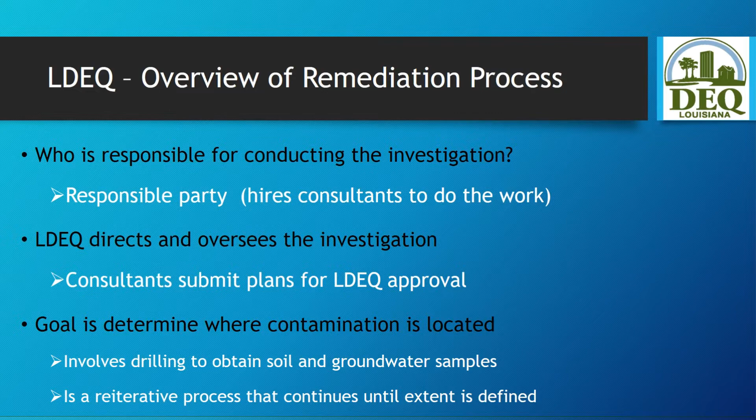Now to discuss the remediation process as it relates to the Dresser facility, which is located at 8011 Shreveport Highway in Pineville, Louisiana. In this particular case, the department was notified of a total petroleum hydrocarbon detection in groundwater at a single location on site in the summer of 2012. The site was assigned a DEQ team leader to oversee all activities, who directed Dresser to submit a work plan to delineate that detection. Once the work plan was submitted to the department and the department was satisfied with the work to be conducted, Dresser scheduled that work to be completed by contracting with a drilling contractor. The initial soil and groundwater investigation was completed on site, and once the sample results were obtained from an environmental lab, a final report was put together and submitted to the department.

The report, which was reviewed by DEQ, indicated the contaminant was a chlorinated hydrocarbon, trichloroethylene, commonly referred to as TCE, rather than a petroleum hydrocarbon as originally reported. TCE was detected in the delineation borings which were completed. Based on those results, Dresser was instructed to continue sampling outward from the source area to find the outer edge of the groundwater plume. We refer to this process as delineation. Dresser was also instructed to determine the likely source of the contamination and to determine groundwater flow direction of the groundwater plume. The process of determining the extent of contamination is an iterative process.

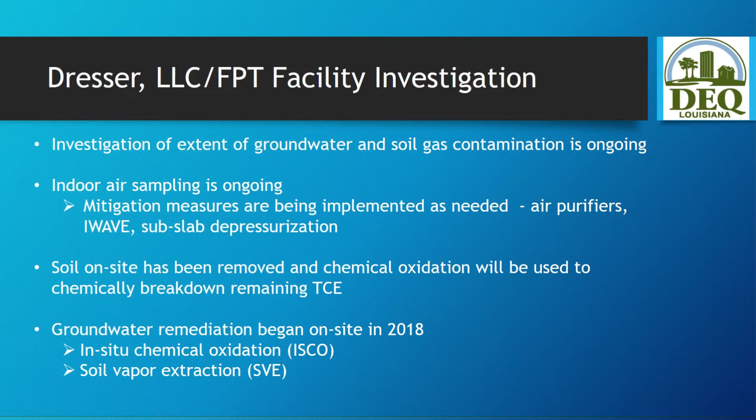To summarize DEQ's role in the response actions, the department has taken the lead in directing the investigation and remedial activities. We've reviewed, provided input to, and approved the sampling work plans. DEQ staff have provided daily oversight of the investigation. We've reviewed data conducted for groundwater, soil vapor, indoor air, and ambient air samples, and the DEQ team has participated in weekly investigation update meetings with Dresser and Louisiana Department of Health.

As discussed earlier, the department has provided notification to residents, addressed community concerns, and answered questions via phone and email, provided the community with information on the investigation online through DEQ's Dresser website and through the electronic data management system. We've updated local officials and attended police jury meetings in both Rapides and Grant Parish. Following the Dresser investigation update, DEQ and LDH will address community questions and concerns.

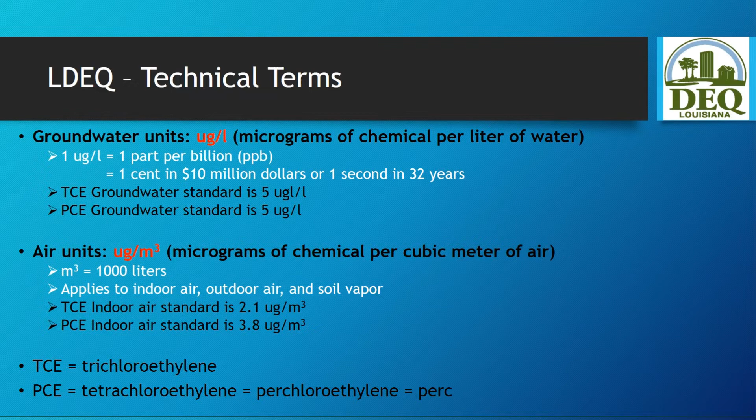I'm Dr. David Holcombe, and I am the Regional Administrator and Medical Director for the Office of Public Health, and I'm here to give you some information about the current work being done at the Dresser site. There are 3 groups that are working in this through the Louisiana Department of Health: the Office of Public Health itself, the Section of Environmental Epidemiology and Toxicology, also known as SEET, and the Safe Drinking Water Program. Next slide, please.

So LDH has a complex role in this. Part of the role is to coordinate with the Louisiana Department of Environmental Quality. They're also tasked to review sample results obtained through this various testing. They have access to subject matter experts, notably for vapor intrusion, from the Agency for Toxic Substances and Disease Registry, which is actually a part of CDC. And they also are working with the Safe Drinking Water Program. Community concerns can be submitted through a toll-free number, which is not shown here, but is 888-293-7020. Next slide, please.

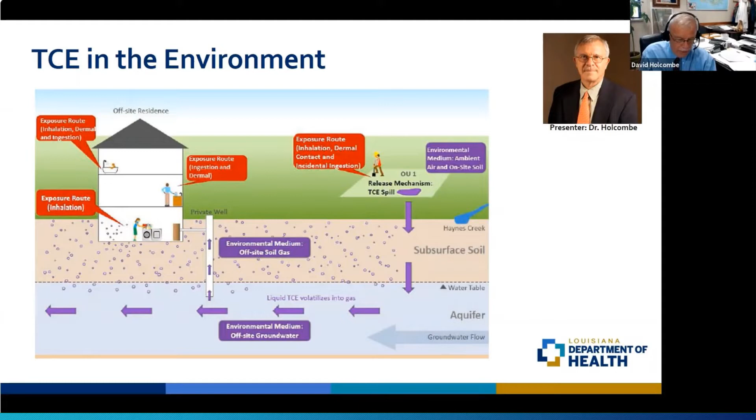So from a public perspective, there are a couple of concerns. Of course, people want to know if the drinking water is safe. As mentioned, the aquifers used for drinking water in this area are much, much deeper than where this product has been located. The public wells have all been tested, and they were found to be below minimum detectable limits, what they call non-detect. So the drinking water is safe, and it continues to be monitored regularly by the Drinking Water Program. There are no superficial private wells in that area which would be subject to contamination. Next slide.

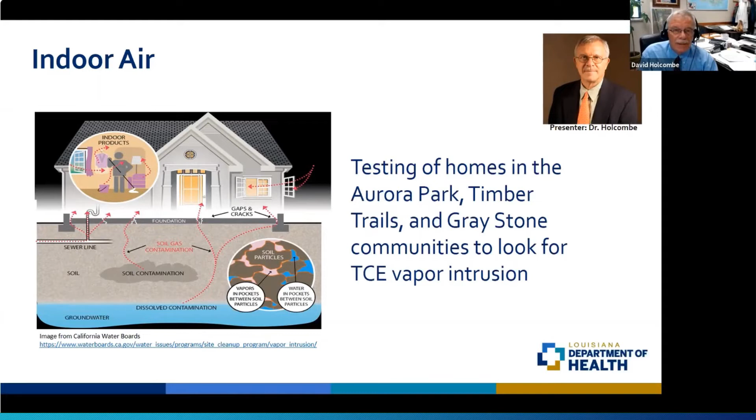So what is going on? They have been testing, trying to figure out the maximum depth and the surface area where this TCE has spread, and people in the area have seen these wells that have gone down. The other part of this is indoor air quality. They've tested in the subdivisions of Aurora Park, Timber Trails, and Gray Stone, which are near where the contamination occurred, and those places are subject to indoor air monitoring. Equipment is brought in that will determine the level of TCE that may be in the air in residences at or near this site. Next slide, please.

So what is TCE's effect on health? Well, TCE is not a good thing because it has a number of health effects. These are usually effects related to high exposures that can occur in people who work with it industrially, which is not the case here. If you were exposed to it as a product, it might give you headaches, dizziness, or sleepiness. But the levels detected in the homes in the Pineville area are well below the concentrations that have been shown to cause these sorts of effects.

Now, there are long-term effects that are related to the immune system, and TCE at very high concentrations for prolonged exposures can cause kidney cancer, liver cancer, malignant lymphomas, and a number of cancers. And this is also particularly relevant to pregnant women because it is classified as a teratogen, which means it can affect the fetus. So it is important to know if people have been exposed, and more importantly, how much and for how long.

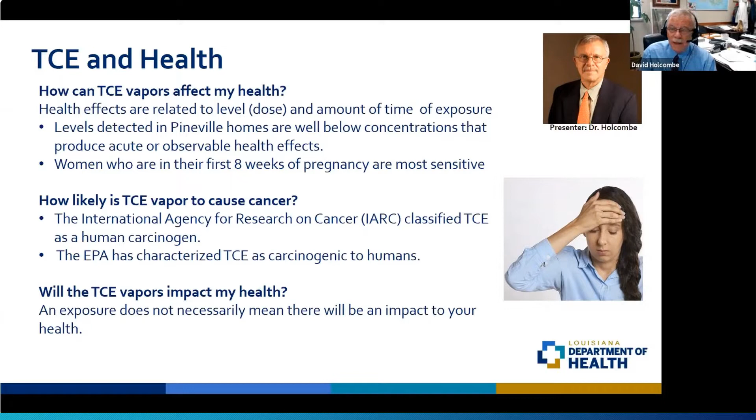So it can affect your health, but is probably not affecting health in the concentrations that are currently being detected in and around the Dresser plant. Next.

So from a homeowner perspective, the question would be, how can I reduce the risk of exposure? You're not going to get it through the water. Some homes which have been tested with indoor air testing will have higher levels. And so you want to ensure adequate ventilation in your homes. That means adequate airflow, but also sealing cracks in the foundations where the TCE vapors may intrude.

If your home has been identified for vapor intrusion sampling, please let them come in and sample. And if they find levels that are high or higher, then they will offer air purifying systems to you. And those are very, very effective. They can drop levels down by 5 or 10 times to levels that are, again, nearly undetectable. So this is more or less the basic information that we're providing to the public in the area. Next.

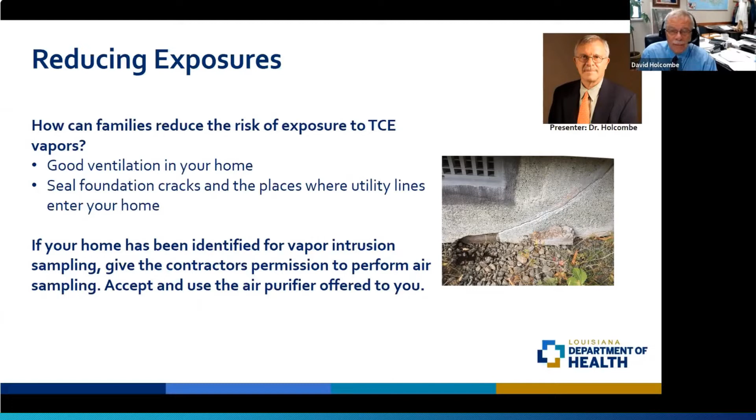There's some contact information for the SEET, which is the Section of Environmental Epidemiology and Toxicology, and to myself, Dr. David Holcombe. I am not a specialist in toxicology, but I am familiar with the area, and I have gotten a lot of information from those individuals who are involved in this project.

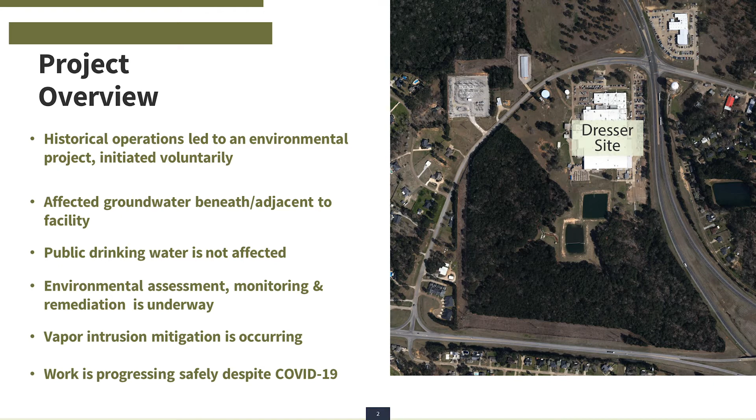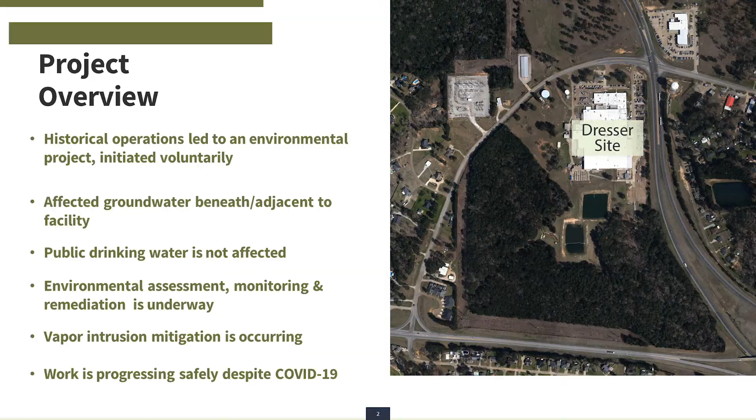In response, Dresser assembled a broad team of environmental professionals and tasked them to fully evaluate conditions at the facility and in the surrounding community. We are committed to making certain that all conditions are completely understood and addressed in accordance with appropriate state and federal environmental, health, and safety rules and guidance. There is no impact to the public's drinking water systems. We currently have assessment, monitoring, and remediation underway. We are also assessing vapor intrusion in the area as a result of our work. And I would like to thank the community for their assistance in us performing these activities during this COVID-19 issue.

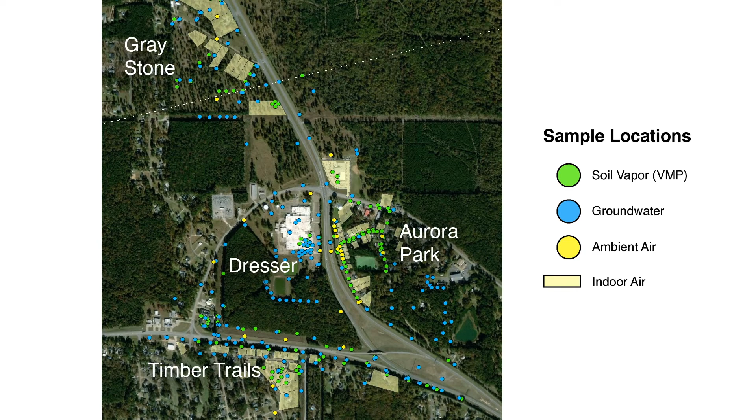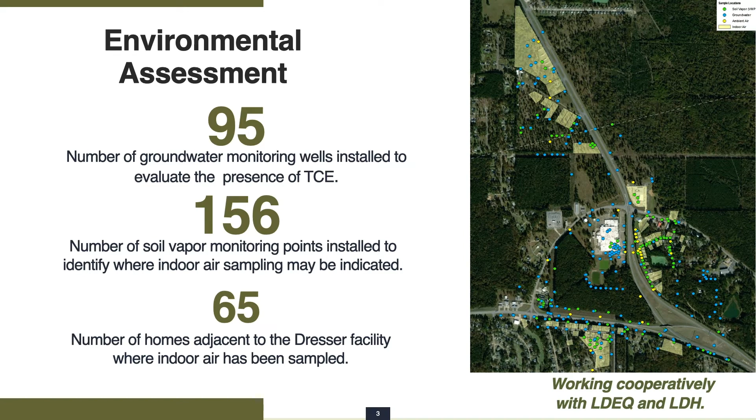Dresser has committed all of the necessary resources to fully understand the groundwater, soil gas, and indoor air conditions on and near the site. A little bit more about the assessment activities we have conducted to date. The figure on the right depicts the locations where we have collected soil vapor, groundwater, indoor air, and ambient or outside air samples. I want to emphasize that these dots on the map simply indicate where samples have been taken and don't necessarily mean that TCE has been found there. If you live near these areas, you may have seen our field crews doing their work. To date, we have installed 95 monitor wells to look for the presence of TCE. We have also installed 156 soil vapor monitoring points. Additionally, 65 homes have been assessed for vapor intrusion.

We will discuss these in a little more detail in a second. Again, I would like to thank the DEQ and Department of Health for their cooperation in this process.

Depicted here is a conceptual model of our assessment activities. We look for groundwater, for the TCE in groundwater. Depicted here on the figure is an area that contains TCE in the blue shading. We use the monitor wells to routinely collect groundwater samples to look for the presence of TCE.

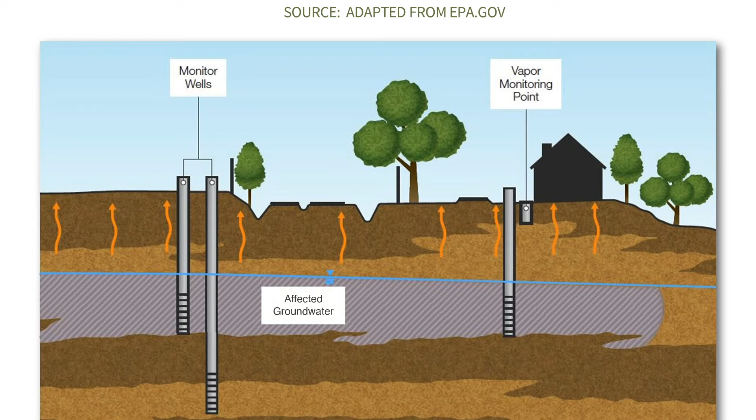TCE is a volatile compound and can vaporize from the groundwater when present. So as shown on the figure, these vapors can rise through the soil. We monitor that through the use of vapor monitoring points as depicted here. Once we identify the location of TCE in groundwater and the TCE in a soil vapor sample, we will then focus on sampling inside a house to determine if those vapors are present.

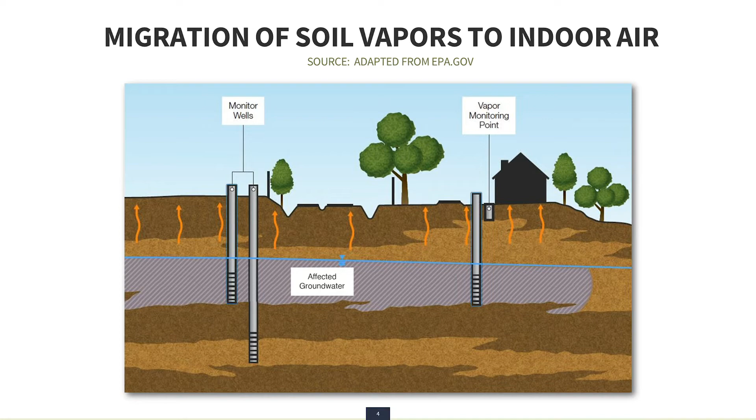As also depicted on this figure, monitoring is being conducted in multiple groundwater bearing zones. We only find the TCE now in the shallowest groundwater zone at and around the site.

So let's talk a little bit more about the groundwater assessment. The goal of our assessment is to look for the chlorinated chemicals of interest, specifically TCE, PCE, and some of the other breakdown products. Again, presence of a dot doesn't necessarily indicate the presence of TCE, just that a sample was taken there. We use this data to assist us in identifying those locations for indoor air sampling. This is a data-driven process.

We evaluate the data that's collected and then propose additional locations so that we fully understand the extent of the TCE and other chlorinated compounds of interest in groundwater. This is done with DEQ and upon their approval. We work with them to identify those locations and then we execute the work.

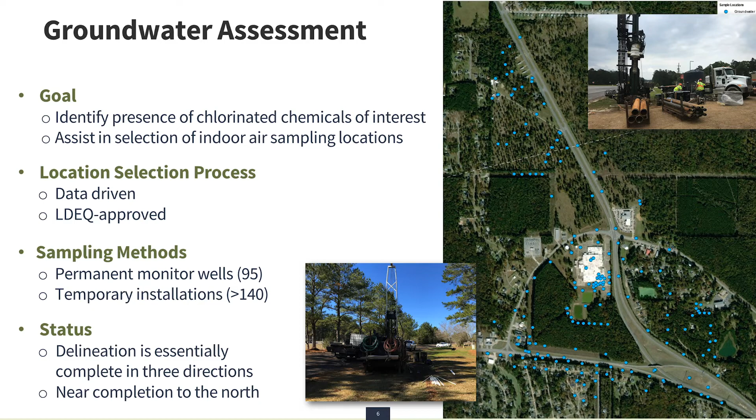The status of our activities is we are nearly delineated, meaning that we understand where the TCE is present. What we have seen is that the areas to the east of the site in Aurora Park are delineated. The areas to the south are delineated, and we are still working on some of the areas in the north along the parish line between Grant Parish and Rapides Parish.

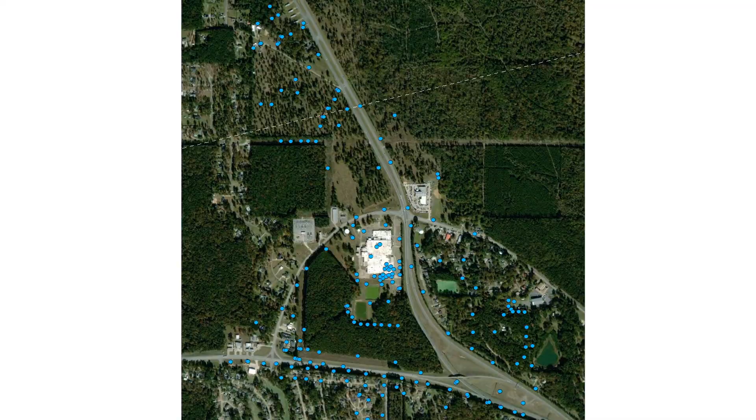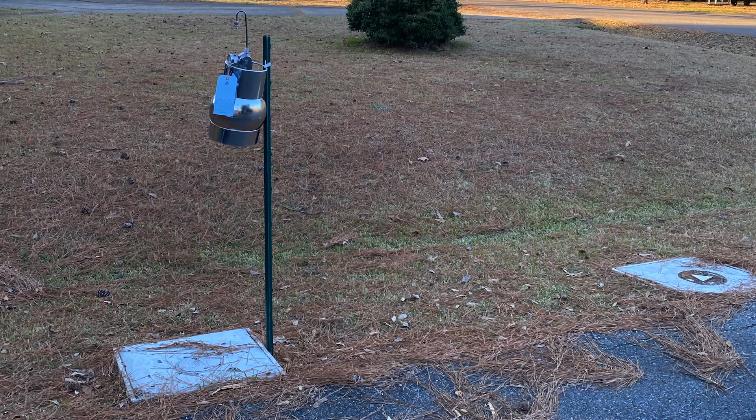A little bit more about the soil vapor assessment. Again, these are samples that are collected to look for the presence of the chlorinated chemicals of interest in the soil gas. These data assist us in selecting the houses that we use for sampling indoor air. Depicted on the right in blue are the locations of the soil vapor monitoring points. The photograph on the upper right shows a soil vapor monitoring point and a monitor well with an ambient air sample being collected by them.

Seeing one of these sampling devices near your house doesn't necessarily mean that there is TCE there, just that there is an area that has been or is being evaluated. This is also a data-driven exercise where we evaluate the data and then propose additional locations. DEQ works with us to identify the locations and approves our work. These activities are ongoing and we'll continue them until we fully understand the extent of the conditions at the site and around the site.

A little bit more about our indoor air sampling program. The goal of our program is to identify vapor intrusion, the potential for vapor intrusion to occur, that is the presence of the chlorinated chemicals of interest in a house or a structure. This process is also data-driven, and we use a protocol developed with DEQ to identify those homes or structures where indoor air sampling should occur. We evaluate, as I said before, the groundwater data and the soil vapor data to do this. Once a home is identified, we use a technique of collecting the indoor air over a period of 24 hours.

On the upper right is a picture of the Summa canister, also on the lower left. The lower left is a canister within the house collecting air samples. These data are taken and submitted to an analytical laboratory for evaluation. Those data are provided to us, and we review them with DEQ on a routine basis. We also share that information with the homeowners.

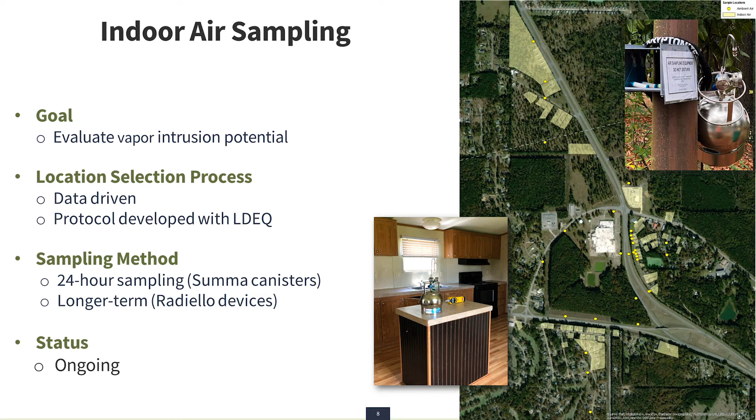These activities are ongoing and will also continue until we fully understand the extent of the conditions in and around the site. Depicted on the figure are those locations where we have conducted the indoor air sampling. They are shaded in yellow. The yellow dots are locations where we have collected ambient air or outdoor air samples.

28-day ambient air samples were taken numerous times and were non-detect for TCE and the other chlorinated chemicals of interest. Also, ambient air samples over shorter periods of time showed either extremely low or no detections of TCE. We believe there is no health risk related to the ambient air surrounding the Dresser site. These data help us understand the potential vapor intrusion condition.

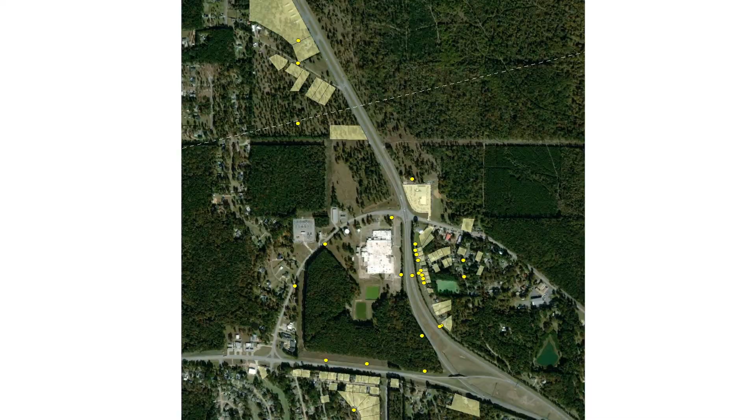Once we have identified a chlorinated constituent of interest within a house, we have various mechanisms to fix the vapor intrusion condition or mitigate them. They are both short-term and long-term measures that we can take. We have at our disposal air purifiers, systems that can attach to the home's air conditioner system, and also systems that are in place under the home. These systems allow the vapor to be filtered from the air.

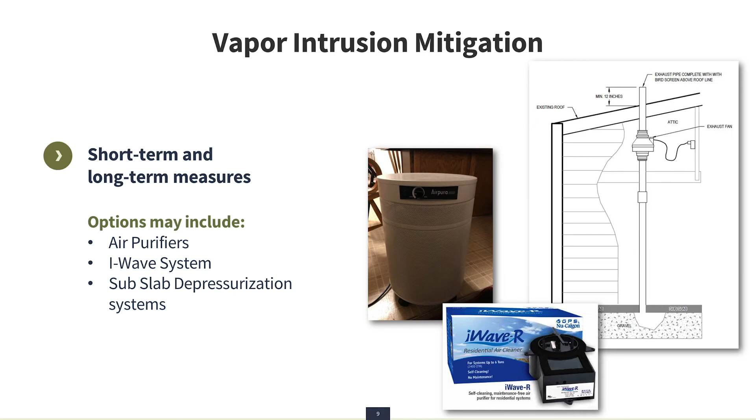So once the vapor is identified during an indoor air sampling, an air purifier is offered to the resident. To date, we have approximately 27 of these systems deployed in the community. We also look at these longer-term measures, such as the I-Wave air purification system and the subslab depressurization system. The subslab depressurization system prevents vapors from entering the house. It's much like a radon mitigation system, which some people may be familiar with.

In addition to the assessment work, we are continuing our remediation efforts to clean up the TCE and other chlorinated chemicals of interest in the groundwater and soil gas. We have focused on soil, vapor, and groundwater. For the soil, we have removed or excavated those soils which have shown high concentrations of TCE or other chlorinated chemicals of interest. The soils were removed and disposed of off-site at an appropriate facility.

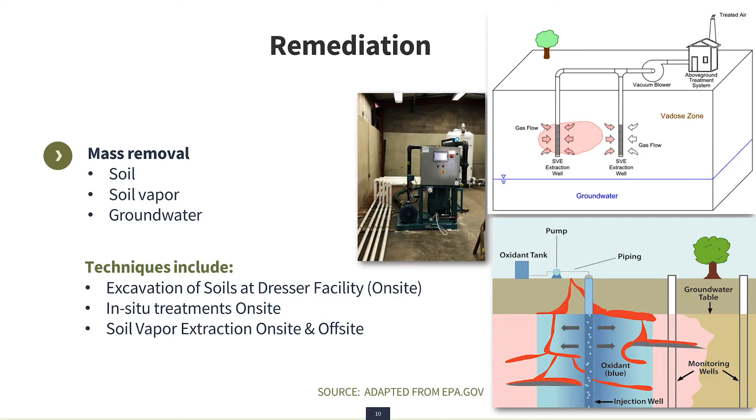We also have conducted in-situ treatment of groundwater through the introduction of other material that eliminates or destroys the chlorinated chemicals of interest. The diagram on the bottom right depicts the injection or introduction of these oxidants into the subsurface and destroying the chemicals of interest. The picture on the upper right is of a soil vapor extraction system. Those remove the soil vapors, treat them at the surface, and then release clean air.

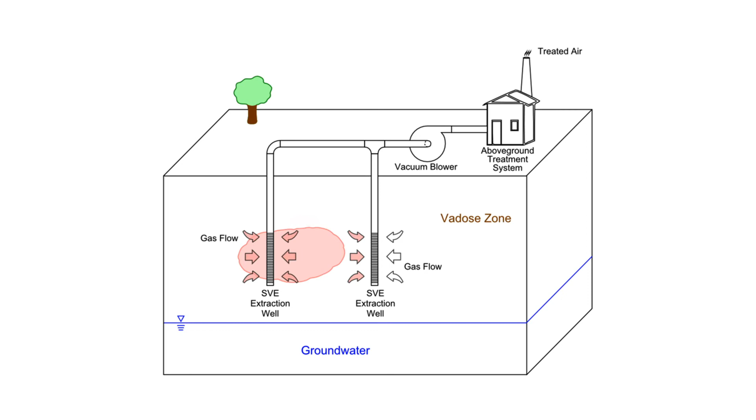These activities have been ongoing for some time, and they will continue until we remediate or clean up the groundwater conditions that exist. So looking ahead, again, the public drinking water systems are not affected due to the conditions that exist in and around the Dresser facility. We are committed to our efforts of monitoring and remediation or cleanup at the site. We're here to work with the community and our elected officials in the area and the Louisiana Department of Environmental Quality and Department of Health. We do work cooperatively with them, and we appreciate everybody's assistance in this process.

So for additional information, again, I would point you to the Pineville information line or the Dresser website at www.dresserpineville.com. We are committed to addressing any questions an individual may have. Contact the information line, and we will get a representative to respond to your concerns or questions within a 48-hour period. Again, I'd like to thank you for the time, and we appreciate the community support and the support of the state agencies in conducting this assessment.

Thank you. We will now be answering the questions received by LDEQ through the Dresser Community Meeting email address. The first question: once the contamination site has been delineated, will it be possible to control the spreading of the pollution, or are we looking at continual enlarging of the plume over the years?